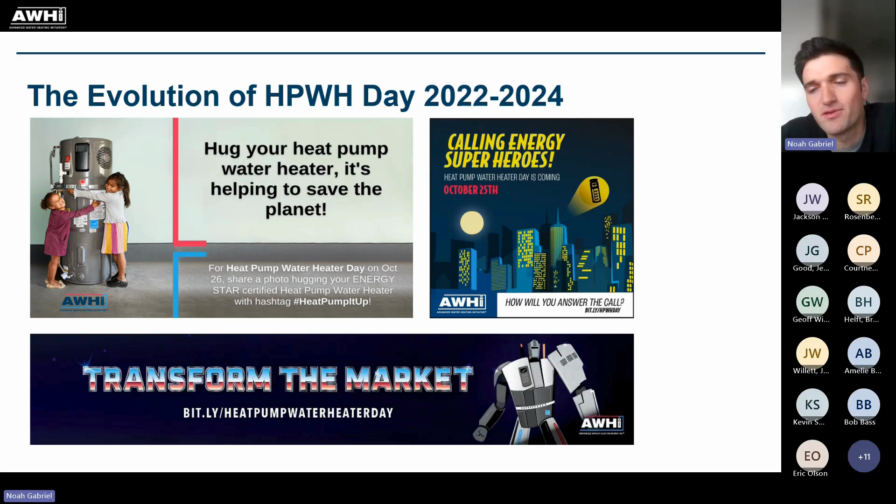So there's been an evolution of Heat Pump Water Heater Day where we've tried out some different themes, which has been fun. We had a lot of great graphic design this year, and I think making heat pump water heaters flashy in any sort of way that we can is going to help get people excited about the technology, right? And we had this market transformers theme, which is super fun. So kind of the different facets of how you can push this market forward, whether it's through policy levers, through new and innovative products, or through well-designed programs.

And I kind of talked about this already, but had some of our own connectivity working group members presenting, as well as some awesome keynote speakers, such as from Secretary Granholm. And I was even surprised at this too, just how many folks registered. So quite a huge bit of participation. So really good to grow our audience for load shifting especially. Just some quick stats on LinkedIn impressions. So got a ton of buzz.

And then we do have another upcoming webinar, off topic from here, but if anybody's interested, a commercial refrigeration webinar. You can load shift with everything, and especially these are CO2 heat pumps, which are great for storage. So just a FYI.

And with that, I'm going to turn it over to either Jeff or Eric from NEEA for a second here to talk about some CTA 2045C updates. Good morning, everyone. For those of you that don't know me, my name is Eric Olson. I work at NEEA in our emerging technology and product management team. I'm stepping into some of the load flex and connectivity work that Jeff was previously leading, since he has decided that he deserves retirement, and we fully agree with that.

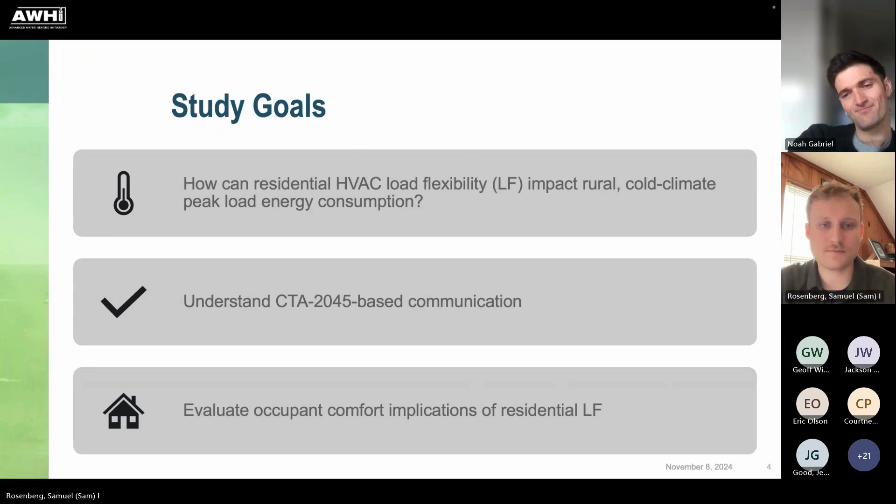So I won't go too deep into CTA 2045 because I might be pretty low on the list of experts on this call, which is nice. But it is, as many of you I'm sure know, an ANSI CTA standard that was published in 2013, and CTA 2045B published in 2021.

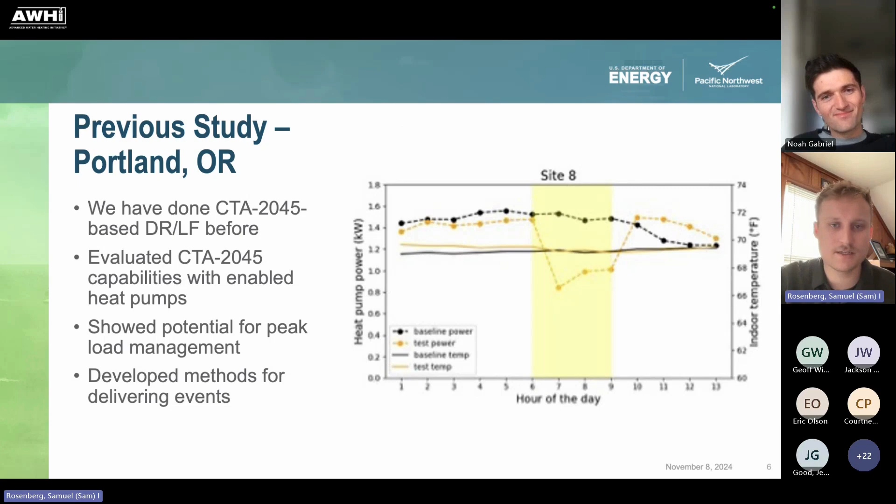So we wrapped up in Portland and we said, bring on the cold, and we went up to Alaska, Cordova, Alaska specifically. This is a beautiful fishing town in southeast Alaska, about 180 miles outside of Anchorage on the coast. They have a local co-op electric utility with a 1-to-1 vote, basically, for each resident in town. There are about 2,200 people in town. And that co-op utility was very excited to work with us on this, as they have their own goals around bringing electric space conditioning into town. And there's also a lot of local momentum outside of the utility.

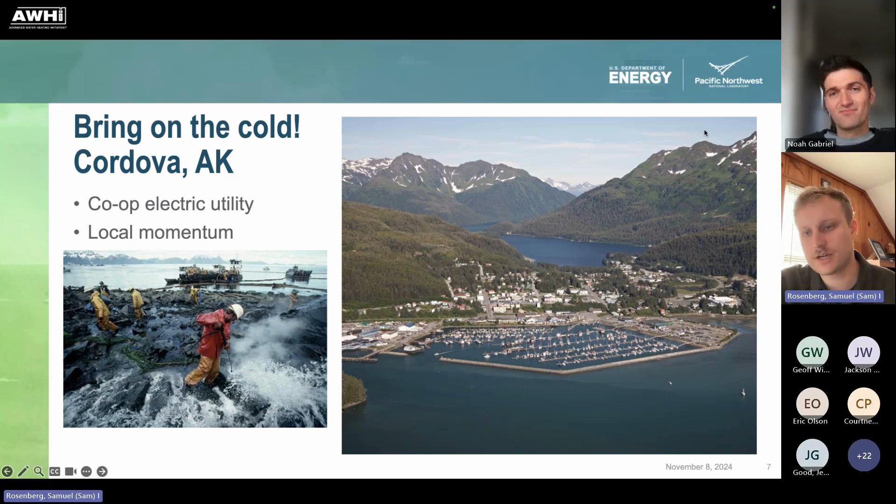That picture in the bottom left, you can see some guys pressure washing the ocean. That is just following the Exxon Valdez oil spill, which happened about 30 miles away from the harbor in Cordova. They have been dealing with the impacts of this for a long time. Many people who live in town now saw this firsthand. And as a remote village that relies entirely on fuel oil for heating before this study, and they do a lot of heating, there's a lot of local momentum to shift away from these things that they've firsthand seen the repercussions from, at least one of the types of repercussions from. So that was really handy when we were recruiting and just coming to town in general, and has really helped our larger market transformation as a result of this project.

Cordova is great for heat pumps and demand flexibility for other reasons as well. First of all, excellent weather. It's not too cold. It's in the 20s to 30s during those coldest months, up into the 50s, 60s in the warmer months. There are some 80-degree days in Cordova. A lot of solar gain, a lot of windows. People are excited about air conditioning. So that's been another great selling point for heat pumps in Cordova. They also have a great renewable and fuel grid mix. In the summertime, they operate mostly on hydroelectric generation. In the wintertime, those rivers freeze and they revert back to diesel. Although they do have some major projects in coordination with DOE and funded by the federal government and state governments to increase generation during the wintertime from renewable resources through a variety of pathways.

And additionally, those existing heating systems, you see an example in the bottom left there. You have a pretty standard single point space conditioning heater. You'll often find one of these in a living room in Cordova. No other locations in the home will have a heating source. And it's kind of, let the wind take it kind of thing with these systems. They also have a lot of aging fuel oil storage systems outside, which are leaking, expensive to clean and repair, and another great selling point for decommissioning or replacing or assisting with an electric heat pump.

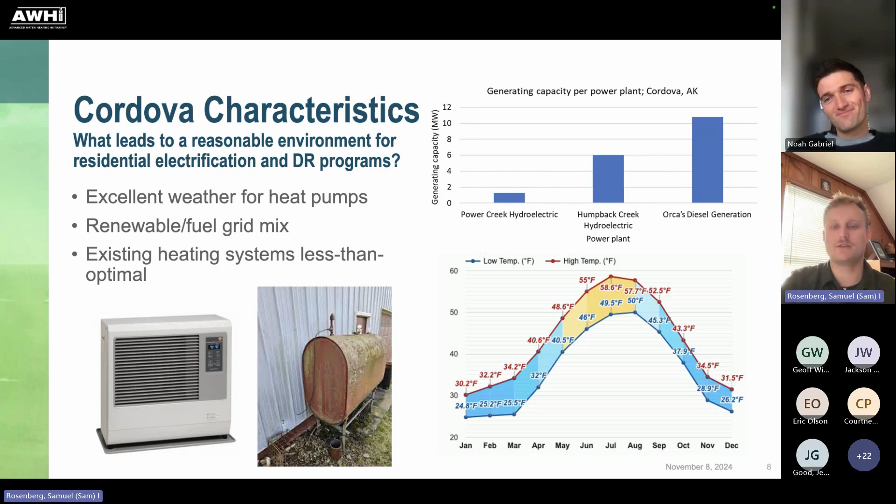So this study was not easy to initiate. We first went up there and found that nobody local was installing heat pumps. We weren't surprised by this, but we're really excited that the local company, which is a two-man show, they were excited to work with us. That's Copper Highway Heating. If you're ever in Cordova, need an HVAC contractor, you can find them. And so we sent them down to Seattle, Tacoma for a training course. We then recruited participants with the local electric co-op.

And then with those participants, we had that HVAC company install heat pumps in their homes. We then came up and installed the CTA 2045 interface and our data loggers, and then got some background info out of the electric utility to help us plan our study and develop our load flexibility methods. And then we did that.

We developed those methods with three main points. We wanted to keep occupants comfortable. We wanted to maximize our peak load reduction and minimize post-event peaking. In the bottom, you see some of the equipment, indoor and outdoor units of the ductless mini split, and then the CTA 2045 interface that plugs into the indoor unit, and the module that plugs into the interface.

So here's a messy diagram of some of the communication. Most of this relied on a cellular modem that delivered a Wi-Fi network in the home, but I think the interesting piece here is the alternative communication pathways provided by this specific implementation of the CTA 2045 communication, allowing some FM and LTE communication outside of the Wi-Fi network that was generated in the home.

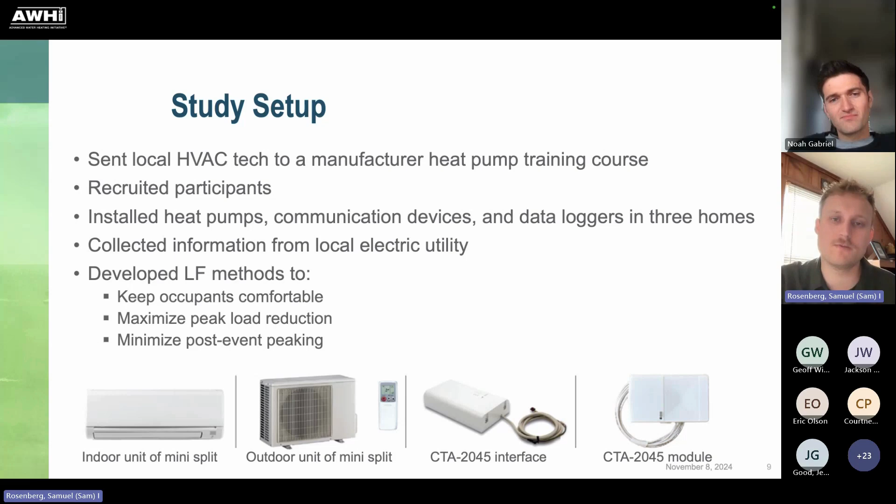Okay. So for our event types, we had quite a few. This is the subset of ones where we were able to collect good data. I don't think I mentioned this. It was a very small study. We had 3 homes in Cordova. We can talk about that more in the questions because that raises questions, certainly. But we lost a lot of data along the way. So these are the events that we could compare to each other and our baseline with good data from multiple homes.

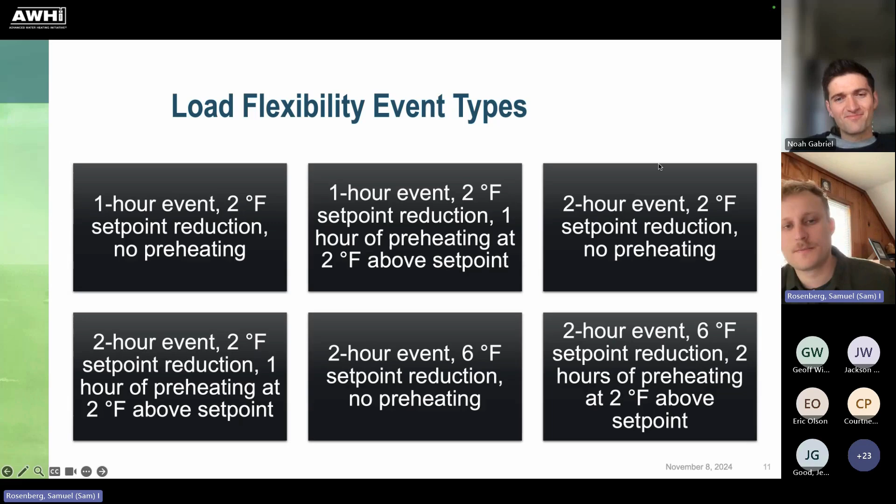So we did a couple 1-hour events with and without preheating, and then 2-hour events with and without preheating at 2 degrees and 6 degrees Fahrenheit set point reductions. And great, it worked. We saw reliable hourly peak time energy reductions during our events over baseline. Some worked better, some were not as strong.

And there's a paper that we wrote about this that really dives into some of the reasons that these were not as strong. But in general, we saw a 6 to 35% hourly energy consumption reduction during those test hours. We also reliably saw that preheating increases the reduction across all tests, and that preheating minimizes occupant discomfort and occupant opt-out, which we believe is largely leading to the success of those events over events without preheating.

But this is another reason that you can never forget that your couch is a battery, and everything in your house is as well. So preheating worked well, and we showed that large set point reductions can be effective. I have 3 stars there because I presented this similar presentation alongside my colleague Chitra, whose entire presentation was around those comfort aspects, and she dives into how those large set point reductions can be dangerous as well as effective, because you can really lose your participant base, and all of a sudden you have a lot of lost potential.

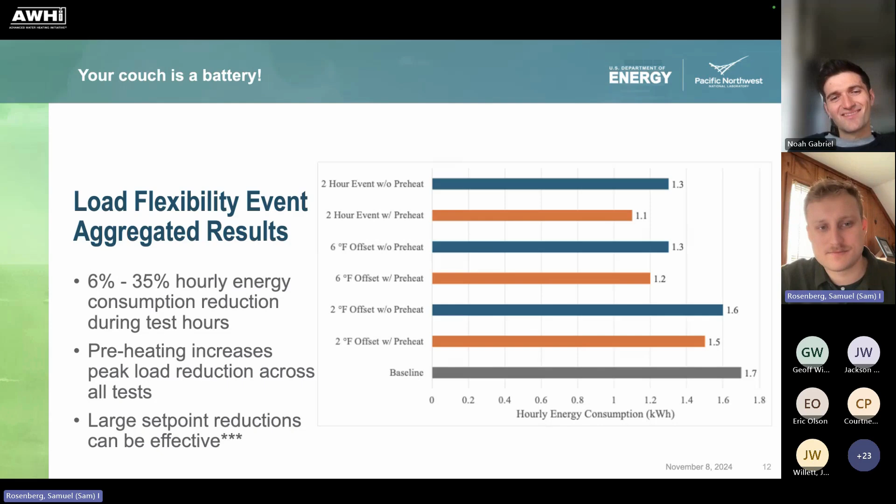Outside of the energy performance, which honestly is as expected, we're seeing reductions when we're reducing set point. That's fantastic. We found that CTA 2045 communication reliability was likely better than other types of communication, specifically better than just relying on Wi-Fi. Various types of communication can be implemented via LTE and FM on top of Wi-Fi. Many other systems rely upon just Wi-Fi.

And so we had a fair amount of lost Wi-Fi network in this study due to the remote location and cell tower issues. We see that in other places as well for a multitude of reasons, mostly around the participant and their activity. So in general, it's reasonable to assume that you'll have some Wi-Fi downtime.

And if we would have been relying upon Wi-Fi only, we would have missed, I believe, 3 events or 4 events. But we were not, and we ended up missing 0 events during the testing periods through the study. So there's some more work for us to do here. We have data that we need to analyze, but preliminarily, it seems much more reliable to use a multi communication pathway to send these types of signals. The information you receive back is less important, we find, than sending the event directly, especially as you scale.

specifically because of this. So this is not my house, right? This is also a remote location. This is pretty common. We used a cellular modem to deliver that Wi-Fi network. It's a modem that has a SIM card in it that is talking to an LTE cell tower. Then that modem provides a Wi-Fi network in the home. So we lost Wi-Fi because of that

cell communication. In our Portland study, for example, we lost Wi-Fi in some homes because of people changing passwords that the equipment was connected to. We lost Wi-Fi because people didn't pay their bills. We lost Wi-Fi because people unplugged something and plugged the Ethernet cord into their TV for better streaming, or their Xbox for gaming. There are many reasons you lose access to Wi-Fi in an occupied home. And whether that's intermittent or permanent is a different question.

But being able to send signals to the equipment and hopefully receive some information back via something that can't really be impacted by the home occupant's activities, we think that's pretty important. And we think that will become more and more important as you scale a program like this up to hundreds, thousands, tens of thousands of end use devices that are trying to be used together to do a grid scale peak load reduction across a grid that's bigger than 800 homes, as we see in Cordova, or actually including in Cordova. 800 homes is not a small amount of homes. If we get heat pumps in all of them, we'll hopefully not rely on homeowner Wi-Fi there as well.

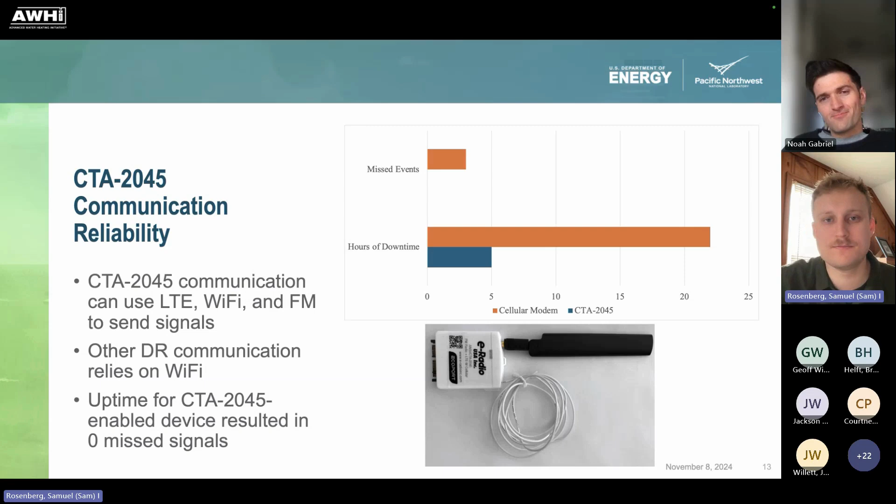So some observations from the homes and systems. This was the first time anybody in town had a residential heat pump. So there wasn't a lot of experience. There also wasn't a lot of trust. And that was earned through the successful use of the equipment. It worked well for most of these people. And so as time went on, they got a lot more comfortable with the heat pumps. But they did note a learning curve as far as controlling the system and what to expect from the system.

And really, I think only one of our three participating households has crossed over that peak and is on the side of really understanding the system. The other two are doing a lot better than they were a year ago when we installed, but are still getting used to the systems. And we also saw other fuel sources being used sporadically. We left their fuel oil systems in place. And so managing both systems was confusing at first. Although we did ask them not to operate the systems, they still did at times.

And as far as the home characteristics, we did some auditing when we went in. This is a description of each of our three sites. One was a retrofitted shed that was very drafty, and the participant complained about drafts and cold spots before, and then also noted that the heat pump was not necessarily delivering everywhere in the home. This was both a sizing issue and a home characteristics issue.

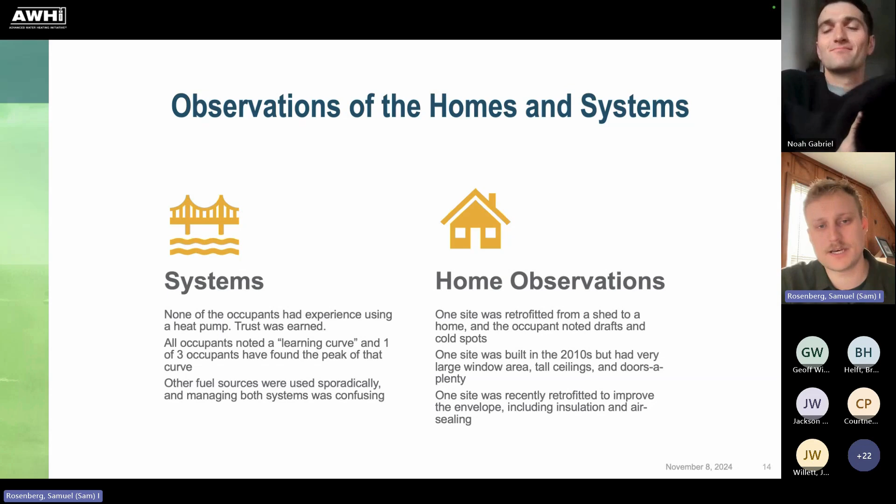And next, what are we doing? We're doing this in a colder location in a lot more homes. We're moving up to Elim, Alaska, which is a 200-person native village just south of the Arctic Circle. And we're doing this in collaboration with the Department of Housing and Urban Development and Weatherization Assistance Program. They installed about 40 heat pumps in those homes, and we're going up to do some monitoring and continue our demand flexibility testing.

This segment of the project will not rely on CTA 2045 as the equipment isn't immediately compatible. But what we're focusing on here is continuing that demand response, demand flexibility assessment, while really bolstering our occupant comfort evaluation. As I briefly mentioned, this segment was more on the occupant comfort side, about learning how to conduct that research. This larger sample will be a more research grade, reliable assessment of occupant comfort.

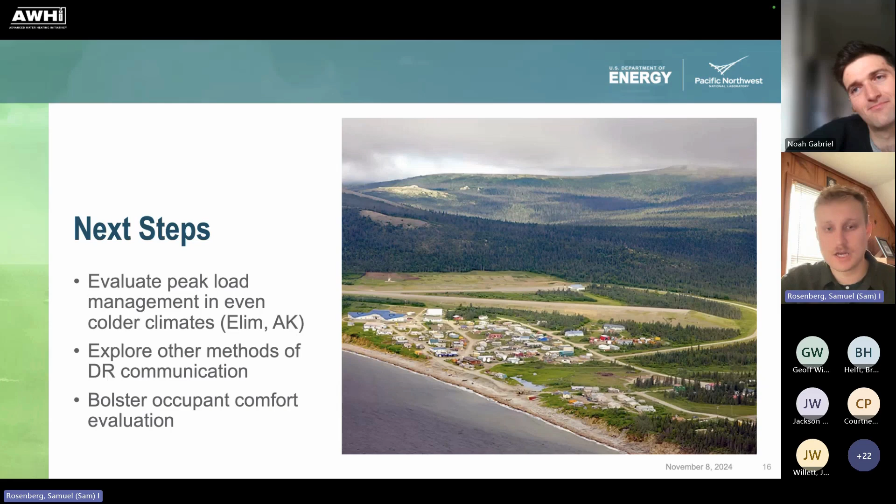That was awesome. And yeah, really glad to get the debrief here. And I think the occupant comfort lessons and set points and everything really applies to all the heat pump water heater work we do too. So this is also interrelated and just points to how we can all learn from each other even more. So I think there are some questions. So Tristan, if you want to jump on.

Hey, thanks a lot, Sam, for a great presentation. So I'm not sure if I really sussed out the difference between the energy efficiency and maybe the way a heat pump works for comfort, right? Versus the actual value of the shift or the flex. And I apologize if you made that clear. If you could just, I mean, yeah.

Sure. I think in general, so the heat pump, this is not a grid that is used to electric resistance heating. So we don't have that baseline load that the heat pump is automatically reducing. We're adding a new electric load here, and if you scale that out to every home in town, of course, that's a very large baseline profile.

The heat pump, and I think a lot of us have probably talked about this at one time or another, allows us to take that baseline load line down a fair amount, but we still see peaking in Cordova in the early morning around 6 a.m. to around 8 a.m. and in the evening. And that's due to your standard peaking drivers.